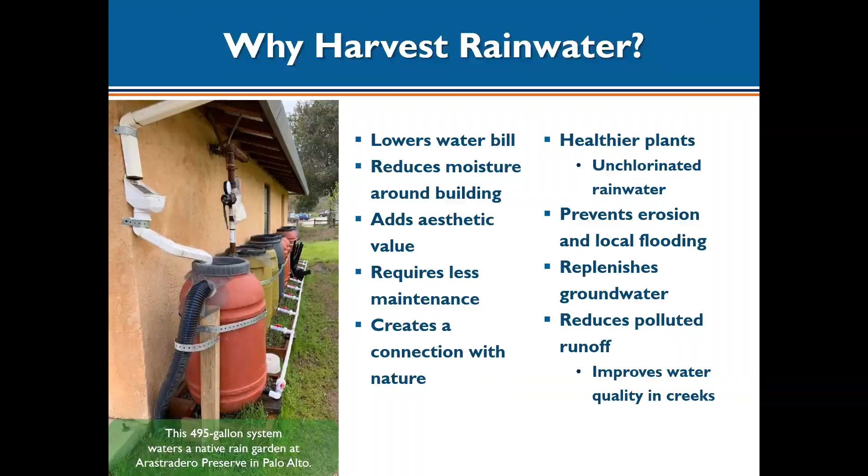We get forest fires that take out, unfortunately, houses and other structures that have non-organic matter in them, and that gets brought up into the air, and the ash comes down onto our area. And when it rains, all of these different things, our garbage and our plastic, all gets washed into our storm drains.

That's okay, right? It's going into the storm drain, we won't see it anymore. But where does that actually go? Is it really okay? So this is what people don't always think about.

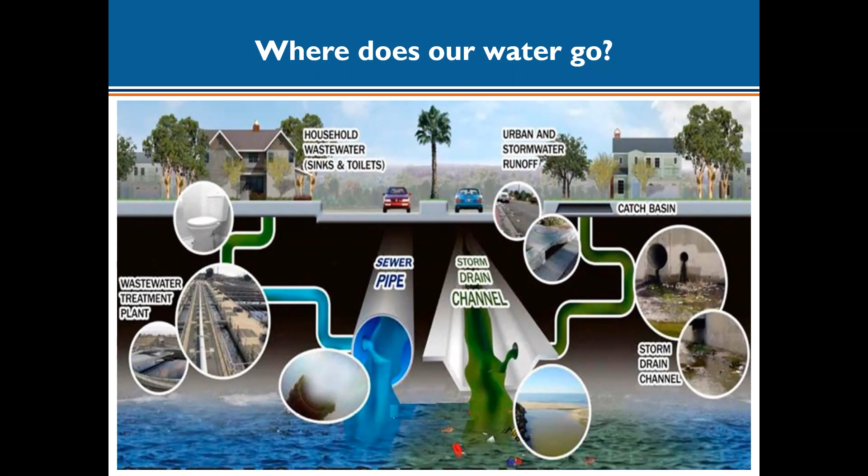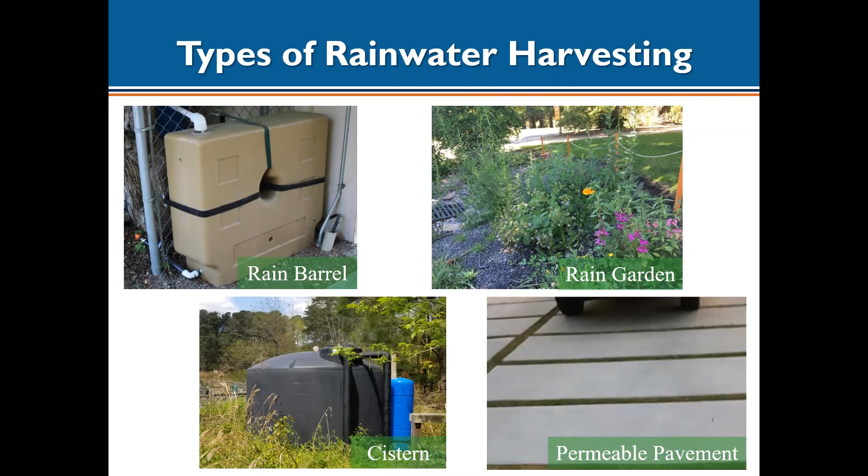So there's a couple different types of rainwater harvesting, and we're going to focus today mostly on rain barrels and cisterns, but I want to briefly touch on rain gardens and permeable pavements, which there'll be future webinars on later this spring. So permeable pavement is a really great tool both for your own house and for municipalities.

We want to slow that water down so that it isn't just rushing straight into those storm drains, carrying all of that pollution with it. Then we want to spread it out onto the ground so it has a chance to sink in. By slowing it, spreading it, and sinking it, we can get more water into the ground to refill our aquifers and filter out towards the bay in a clean way.

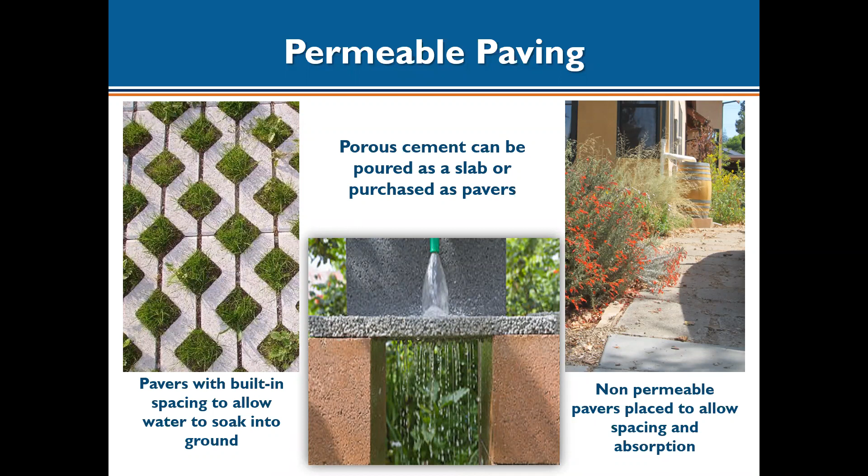The key is the anatomy of a traditional rain garden. The way it's done is you have different layers. It's actually dug out about 10 to 18 inches deep before you plant and before you do anything, maybe even a little deeper depending on how ambitious you are when digging it out.

You've got 3 to 4 inches of drainage rock at the bottom on top of your native soil, and then a very sandy soil called Biosoil. This can just be a porous sand mixed with your native soil, or you can buy Biosoil with compost and sand, which helps infiltrate that water into the ground. On top of that, you want something sturdy to hold it in place—that's the river rocks, with mulch on the side to hold that water into the ground. That will fill up during a rain event, and then look dry the rest of the year because it soaks that water into the ground. It slows the water down enough for it all to soak in without going into a storm drain.

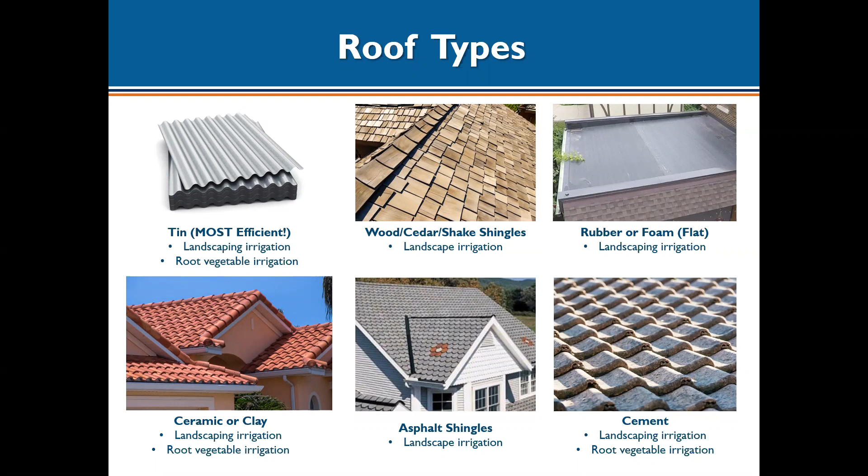When you're choosing your system, you want to think about that roof size. We did that equation earlier, and you want to take it and figure out, for one downspout, how much water actually goes into that downspout. How many downspouts do you have on your house? Does all of your water go into one downspout? Do you have 4 downspouts that are about equal? Or 2 downspouts that not much water comes out of while most comes out the other 2? Consider where your water's coming out.

It's great before you do an installation to go out in the rain and walk around your house to see what's happening with that rain, where the water's going.

You want to take a look at your installation space. If your downspout is directly in front of your walkway, and that's the only way you have to get to your garage or your front door, you may not want to put a rain barrel right there—it won't be easy for you to walk past. You want to think about your space and see if you have an area that won't be in the way for that barrel to sit.

You also want to make sure that you have very sturdy ground for the barrel. You can dig out a little bit and put in gravel to level it, build a frame to fill with gravel, or if you already have a poured concrete pad, you can set it on that.

So just think about what's going to be sturdy. These barrels are very heavy. One gallon of water is a little bit over 8 pounds, so when you get up to 50 or 200 gallons of water, it gets heavy quickly.

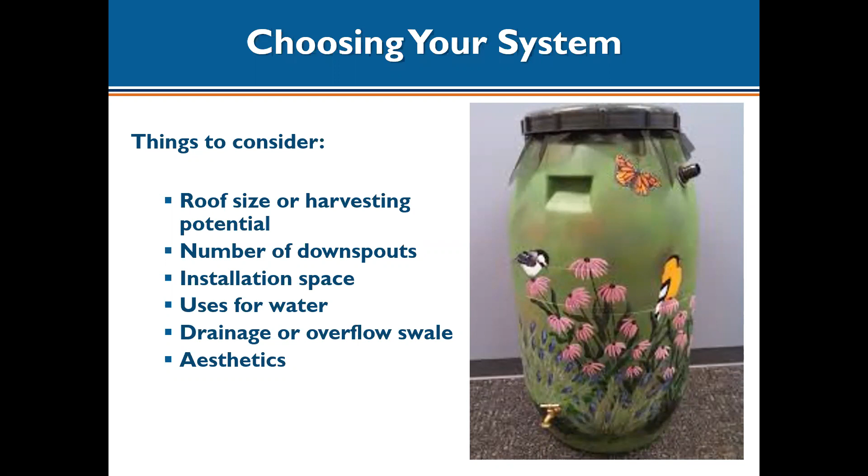And you want to think about aesthetics. You want to make sure you like the barrel you choose, and you like what it looks like wherever you put it. You don't want it to be an eyesore for your house, and some barrels are more attractive than others. I really like the way this one was hand painted, and you can hand paint a lot of them. I can't, I'm not that artistic.

When you have water in your tank, you might want to know how much water there is. Something like a depth gauge is a great accessory to have. It's not necessary - you can tap your hand up the side of the barrel, and when it starts to sound hollow, you're into the empty part, and when you get the thunk thunk, you're in the full part. So you can figure out about how full your barrel is pretty easily without a gauge.

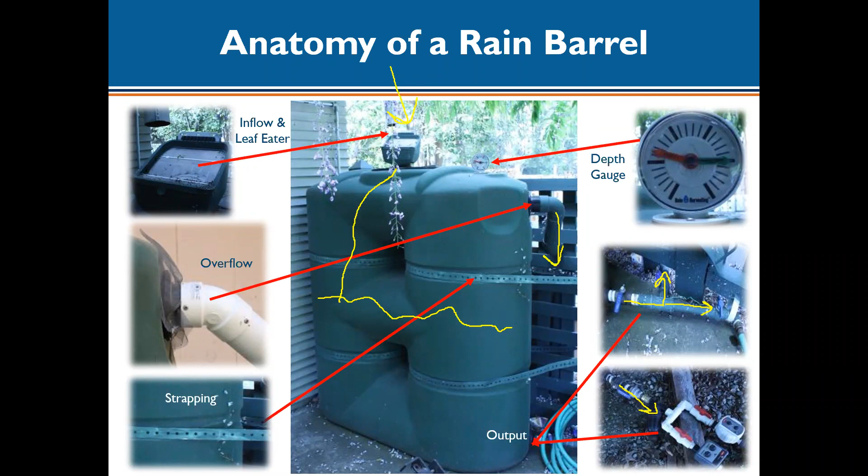Absolutely. Okay, so someone asked, if everyone collects rainwater, will this reduce the amount of water that we refill our aquifers?

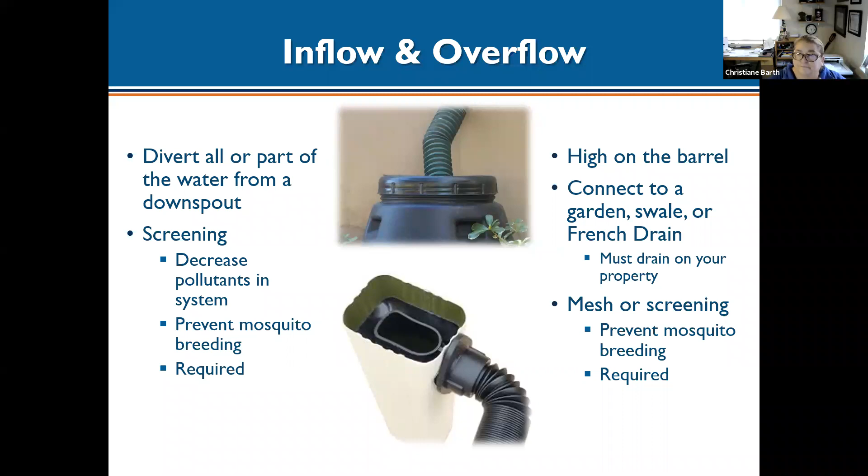It will actually increase the amount of water available to refill our aquifers, because we're going to slow it, spread it, and sink it. So instead of rainwater rushing off into our streets, flowing down storm drains, into our creeks, making them rise and run really fast all the way out to the bay, this will slowly let the water sink in and refill our aquifers, which will fill up our creeks and let them run at a more desirable, slower pace into the bay in a healthier way for the fish and critters that live in the water, and healthier for the birds and wildlife as well. So it will absolutely help increase the amount of water for our aquifers.

So going back to the barrel anatomy, thank you, Christian, for the question. We talked a little bit about the inflow and overflow.

The really important thing is screening. It is absolutely important that we screen both the inflow and the overflow. Someone mentioned mosquito larvae in our original Q&A. The screening is a legal requirement, and it's also common sense, because we don't want mosquitoes in these systems. We do not want to provide mosquitoes a place to breed. We don't want that at all.

To prevent that, you put a screen anywhere that you're having water going in or out of your system that does not have a valve. Anywhere that mosquitoes could come in, it has to be screened. Usually that's your inflow and your overflow. This is also going to keep sediment and debris out of your system, giving you a cleaner system. But the main thing is we do not want mosquitoes in there.

And this system on the bottom is actually really interesting. I'm going to get some red ink so it's easier to see. So the water comes down your downspout like this, and then it'll get caught in this nice rubber gasket. It'll flow into this hose and into your barrel. When your barrel fills, it will come back out, go up and over that, and then back down your downspout.

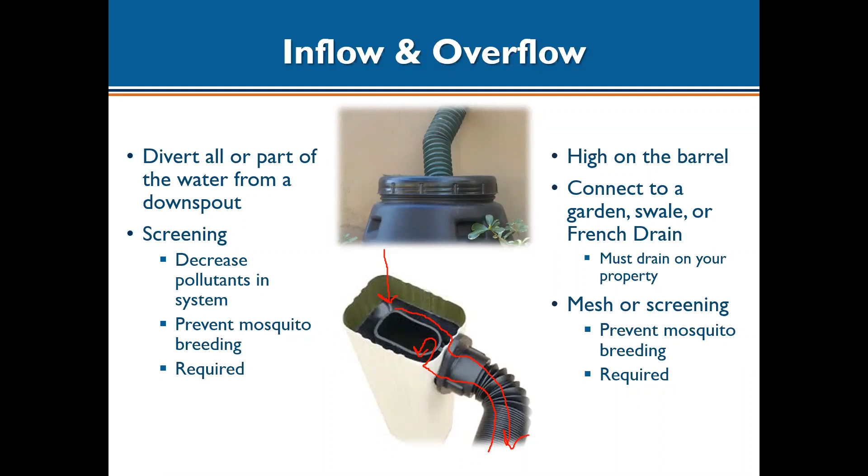With rain barrels, you need to buy gravity fed or zero pressure drip irrigation systems and timers. Those are specifically designed to not be hooked up to a hose or municipal water, but to something that does not have a pump on it. That allows more water to come out of the holes, since there is no pressure except gravity behind them. If you accidentally hook your system up to a hose, it will actually blow out the pipe and you'll have to replace your system.

So it is a different system. You can't just install a barrel and hook it up to your pre-existing system unless you put a pump in before it to increase the pressure to your already municipal irrigation system, if you have drip irrigation.

With rain barrels, I talk about drip irrigation. You don't want to hook up a rain barrel to do spray irrigation - spray irrigation is very ineffective. And with rainwater, there are regulations that it needs to be used with drip irrigation or watering cans or run into a bioswale or creek. You are not supposed to be spraying it into the air, and it's going to work a lot better as a drip irrigation system. You won't use as much water, and it's healthier for the plants because they get the water right at the roots where they need it.

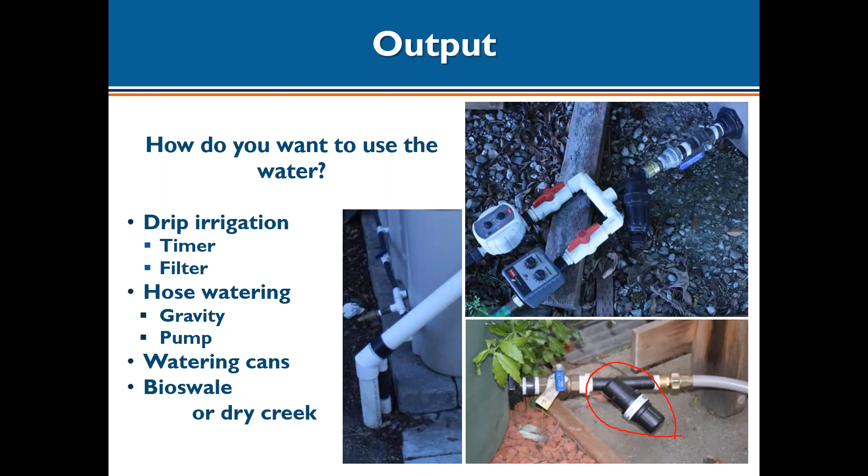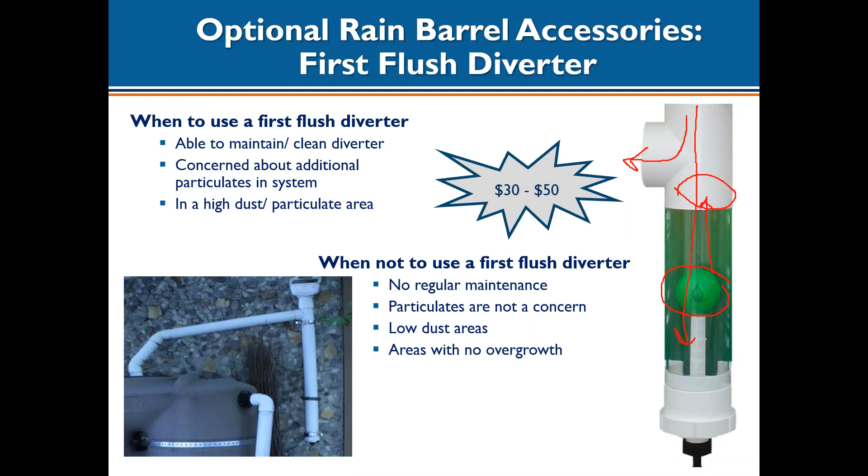First flush diverter is also an accessory. If you live in a very high dust, high particulate area, or you have a giant oak tree right above your downspout, which I actually do, that drops a lot of pollen right on it, a first flush diverter is really good to get those first particulates out. The way it works is the water comes into the system. As it fills up, a ball will flow up to a rubber seal, and once that ball is at the top, it seals the system, and then all the rainwater continues into your barrel. This gets that first flush, the dirtiest water, locked into that, and you clean it out later. That way you get cleaner water into your barrel. I've installed them on about a third of the systems I've installed. It's very site by site.

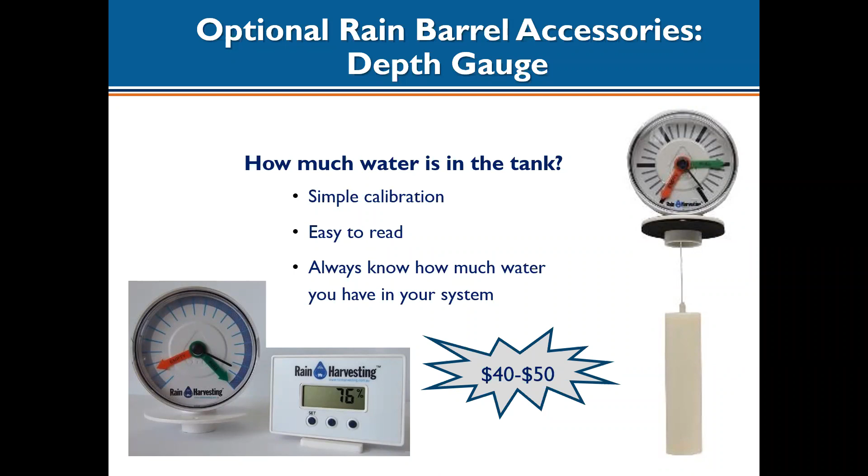Pumps are also a great option. I've installed these at a few sites. You can get ones that are just on demand, plugged into the wall. When you have it hooked up to a hose and turn the hose on, it will start pumping, and you can get a bit more pressure in your system, so you're not just relying on gravity. It's very much a personal decision whether or not you want to pump. A lot of times, if you're into drip irrigation, you don't need that, you just want to make sure your water is running a little bit downhill.

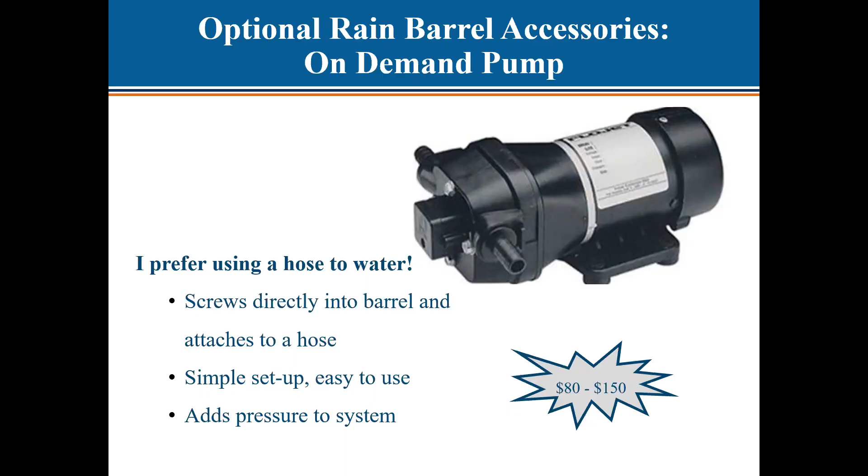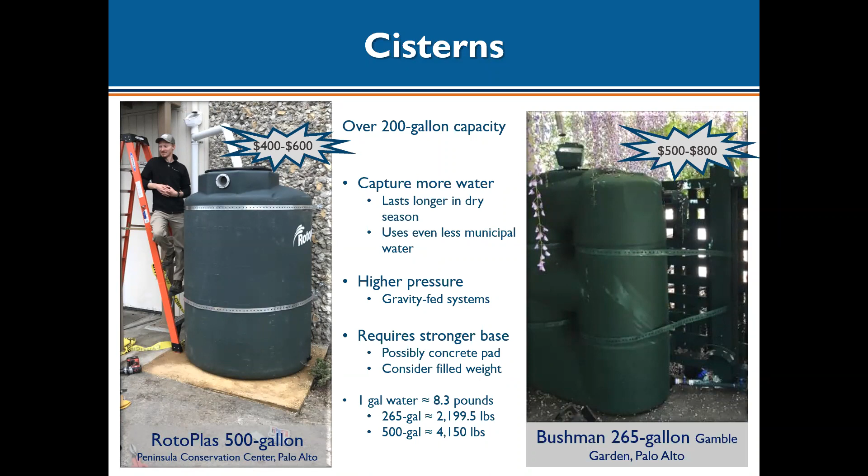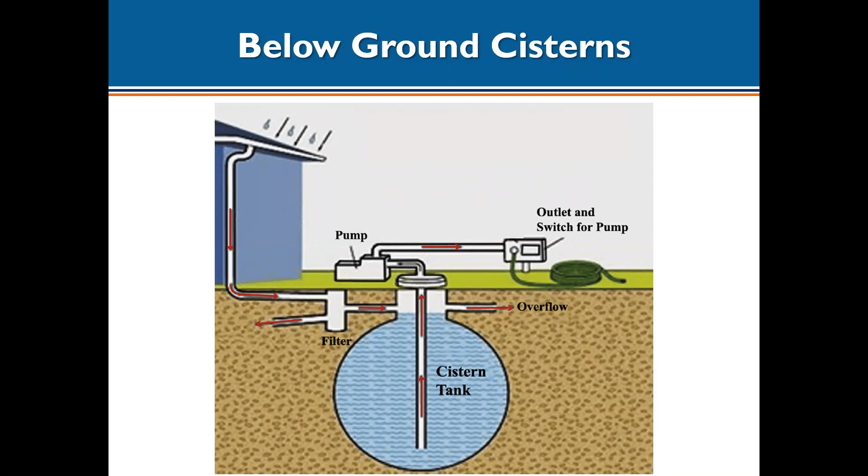There's also below ground cisterns. These always have a pump. This is not something you're going to do yourself at home; it's something you'd hire a contractor to install. If you live in a very urban area here in the Bay Area, you probably don't have room for one of these, so some of the other systems might be a better option. As you get farther away from the bay, property sizes go up, and you might have more room for a nice cistern underground. These are engineered systems, and a contractor will come install these for you and walk you through everything you need to know specific to your system. But these are a great option to have a much higher capacity.

If you, like me, live in a very urban area and your house lot is very small, there are ways to get that 200 plus gallon capacity without having a cistern. You can daisy chain multiple barrels together. These are 2 different ones that I installed throughout the Bay Area, and you can do anywhere from 2 barrels together to 32, 52, however many barrels you want to line up in a row or zigzag around your house. You can turn corners with them.

You can wrap your entire house with these if you so desired. Usually you see 2 to 8 of them together for a system. It's very easy to add on extra barrels later. All you need to do is switch out this part right here from the 90 to a T, and you can put a whole nother barrel on the side and add as many as you want.

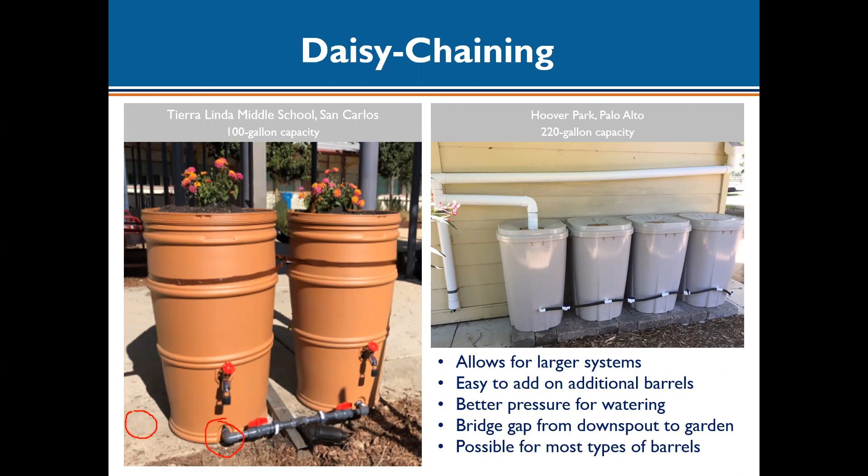So these are really a great option. You can do this with almost any type of barrel. The basic kits that you get online are very good for DIY installations, very easy to do. These run usually $80 and up if you get the full kit together. Sometimes you can get it a little cheaper if you're getting multiple kits to put them together. They have every shape and size imaginable online, and they come with instructions. They are very easy to install.

Food grade barrels are a really great option as well. A lot of people don't realize this, but food grade barrels store Coca-Cola syrup, oil, all sorts of different food items and liquids, and they can only be used once. Once they are used for food, they cannot be used for food again. These are regulations that are in place. So if you're able to take one of these barrels that already had olive oil in it and repurpose it to give it a second life as a rain barrel, it is a great use.

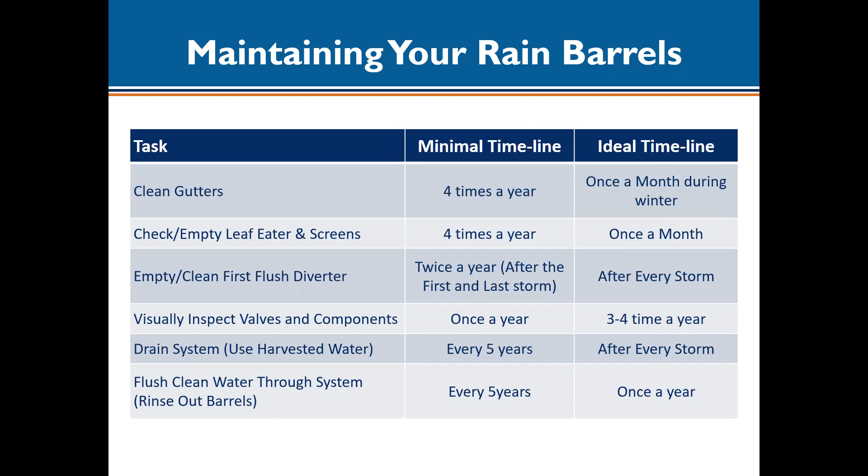It's going to give your plants wonderful nutrients. Every once in a while, it's good to take a hose and rinse out the inside of your barrels, because you'll get fine sediment, and that'll make your whole system run smoother. Use that water regularly. It's great if every storm you can empty your rain barrels and then fill them for the next event—that way more water goes into the ground, refilling our creeks and aquifers. There are so many ways to use it. You can even connect it to toilets for flushing, but you need a permit to do that. It's just great to get this sinking into our groundwater.